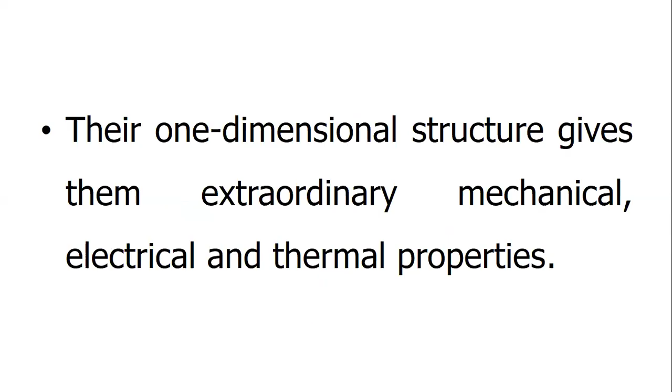Their one-dimensional structure gives them extraordinary mechanical, electrical, and thermal properties. These properties have been exploited for application in flexible electronics, sensors, and energy storage. Structure of single-wall nanotube and multi-walled nanotube.

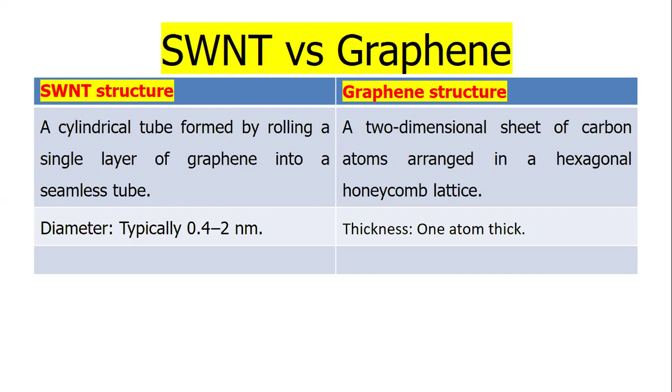Single-wall nanotube versus graphene. A cylindrical tube formed by rolling a single layer of graphene into a seamless tube. A two-dimensional sheet of carbon atoms arranged in a hexagonal honeycomb lattice. Diameter typically 0.4 to 2 nanometers. Graphene thickness 1 atom thick. Electronic properties depend on the chirality and diameter. Graphene

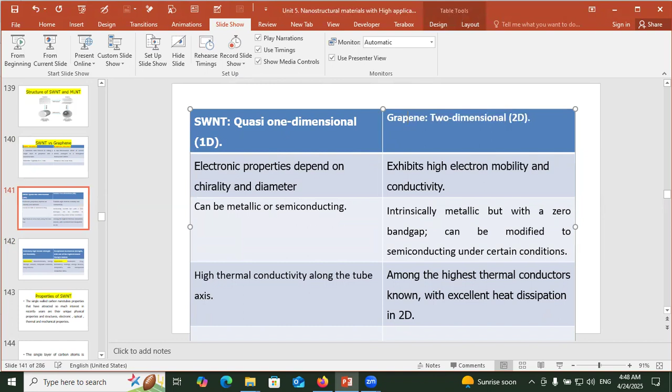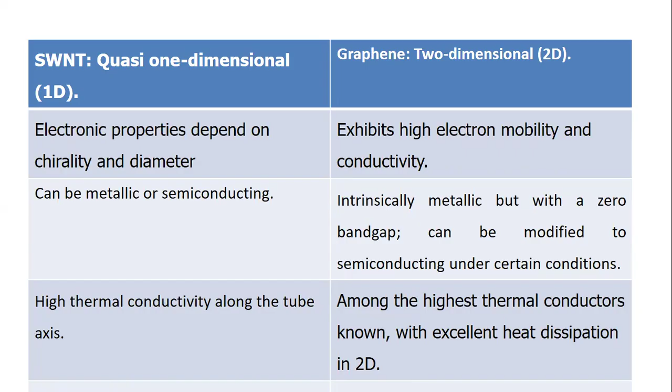exhibits high electron mobility and conductivity, can be metallic or semiconducting, intrinsically metallic but with a zero band gap, can be modified to semiconducting under certain conditions, high thermal conductivity along the tube axis. Among the highest thermal conductors known with excellent heat dissipation in two dimensions. Extremely high tensile strength and flexibility, exceptional mechanical strength with one of the highest known Young's moduli.

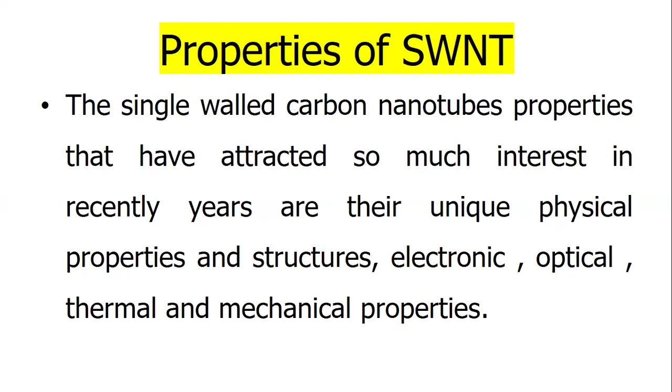Nanoelectronics, energy storage, sensors, composite materials, drug delivery; electronics, transistors, coatings, energy devices, composites, and transparent conductive films. Properties of single-wall nanotube. The single-wall carbon nanotube properties that have attracted so much interest in recent years are their unique physical properties and structure, electronic, optical, thermal, and mechanical properties.

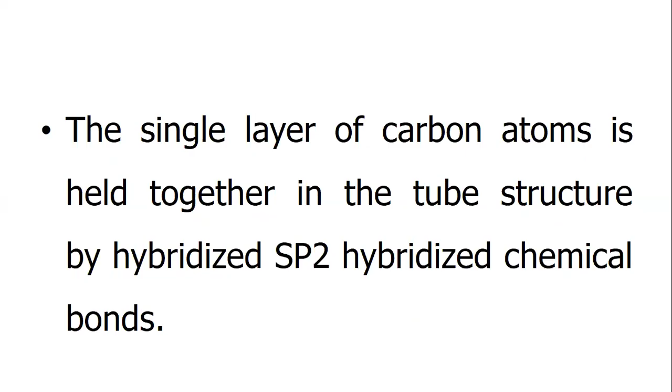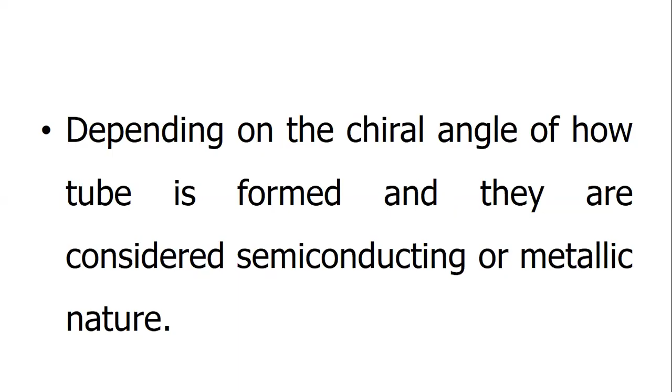The single layer of carbon atoms is held together in the tube structure by sp2 hybridized chemical bonds. Depending on the chiral angle of how the tube is formed, they are considered semiconducting or metallic in nature. Single-wall carbon nanotubes are inert and can be used to increase mechanical and conductive properties in other materials.

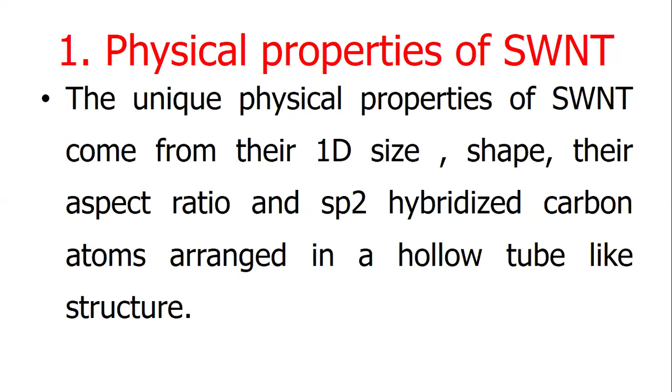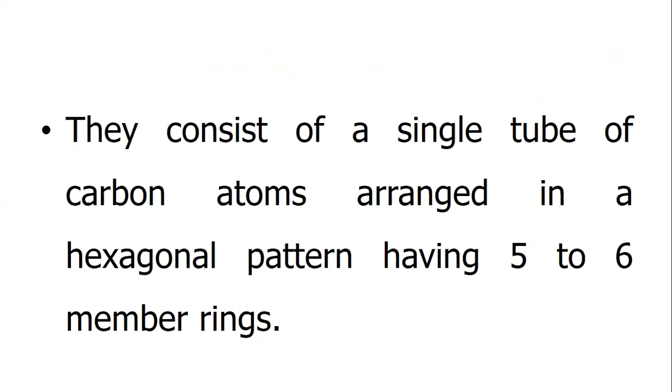Physical properties of single-wall nanotube. The unique physical properties of single-wall nanotubes come from their one-dimensional size, shape, their aspect ratio, and sp2 hybridized carbon atoms arranged in a hollow tube-like structure. They consist of a single tube of carbon atoms arranged in a hexagonal pattern having 5 to 6 member rings.

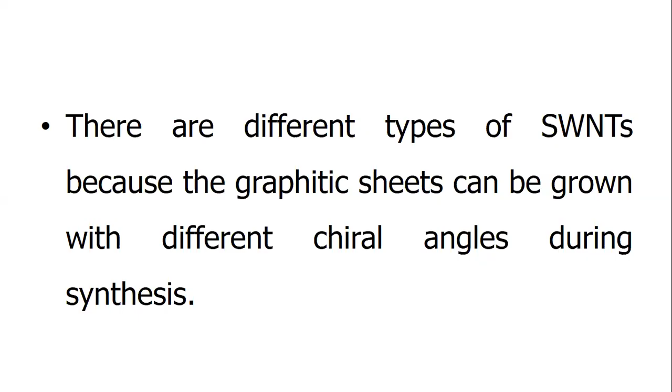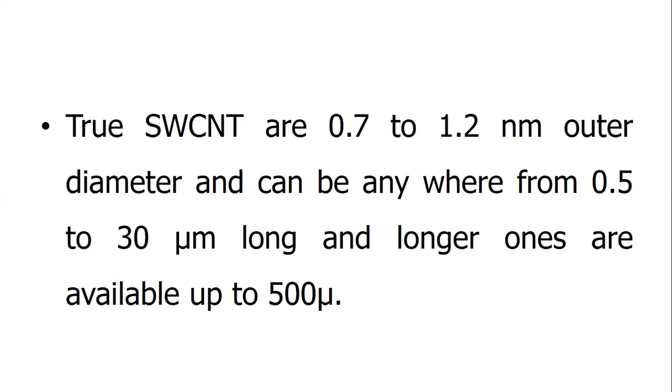There are different types of single-wall nanotubes because the graphitic sheets can be grown with different chiral angles during synthesis. True single-wall carbon nanotubes are 0.7 to 1.2 nanometer outer diameter and can be anywhere from 0.5 to 30 micrometers long, and longer ones are available up to 500 micrometers.

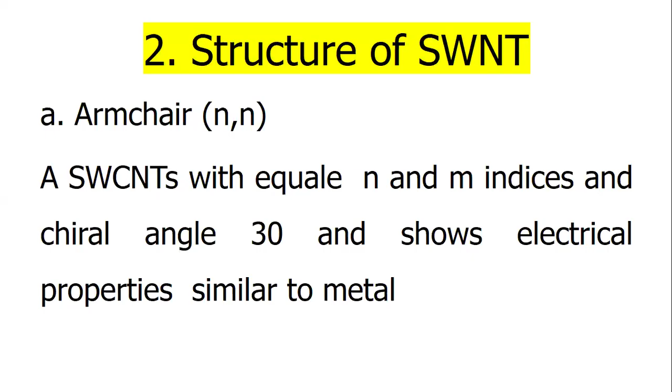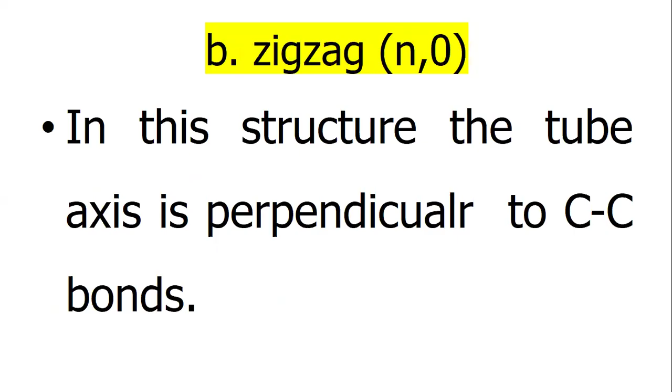Structure of single-wall nanotubes: armchair, or single-wall carbon nanotubes with equal n and m indices and chiral angle 30 degrees, shows electrical properties similar to metal. Zigzag: in this structure, the tube axis is perpendicular to carbon-carbon bonds. A single-wall carbon nanotube with (n,m) indices equal to (n,0) or (0,m) and chiral angle 0 degrees can be either metallic or semiconducting.

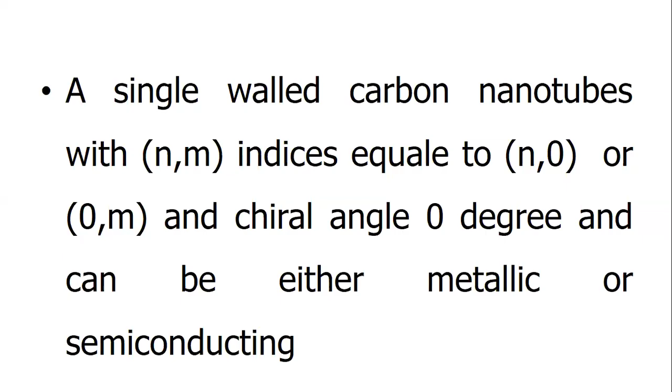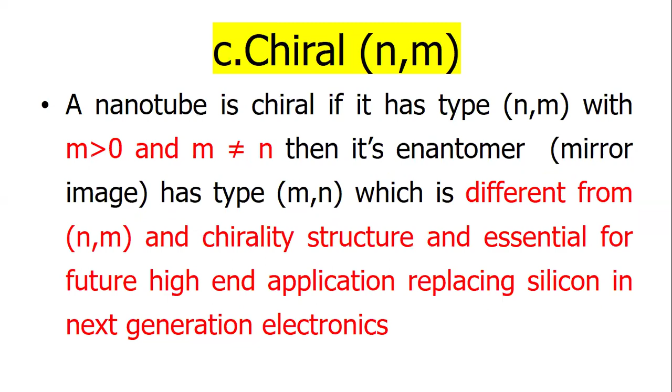Chiral: an (n,m) nanotube is chiral if it has type (n,m) with m greater than 0 and m not equal to n; then its enantiomer, the mirror image, has the type (m,n), which is different from (n,m). Chirality structure is essential for future high-end applications replacing silicon in next generation electronics.

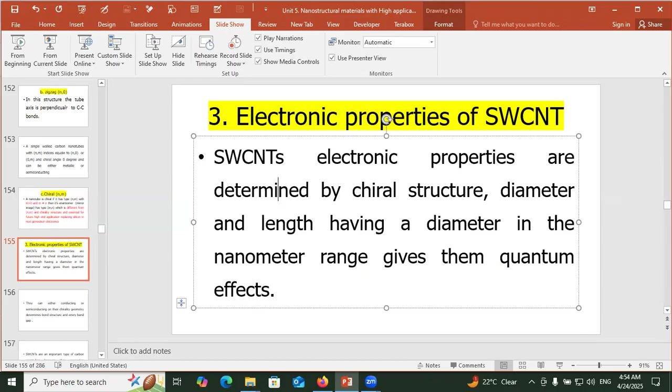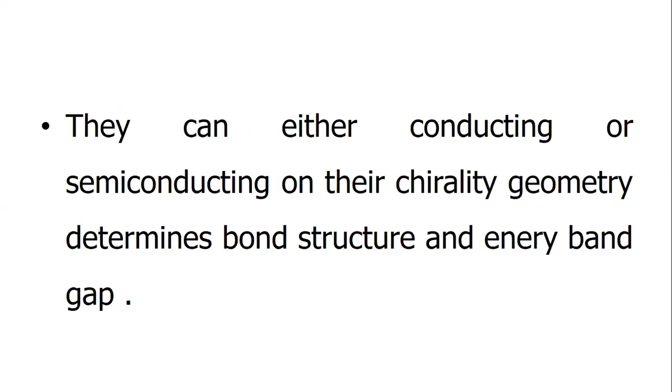Electronic properties of single-wall carbon nanotube. Single-wall carbon nanotube electronic properties are determined by the chiral structure, diameter, and length. Having the diameter in the nanometer range gives them quantum effects. They can be either conducting or semiconducting depending on their chirality. Geometry determines the band structure and energy band gaps.

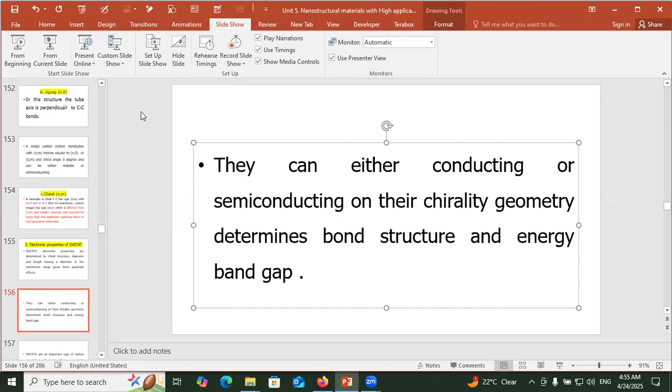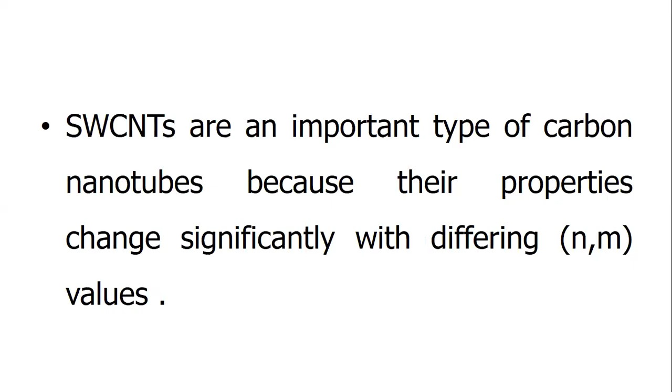Single-wall carbon nanotubes are an important type of carbon nanotubes because their properties change significantly with differing (n,m) values. The band gap can vary from 0 to about 2 electron volts and can show metallic or semiconducting behavior.

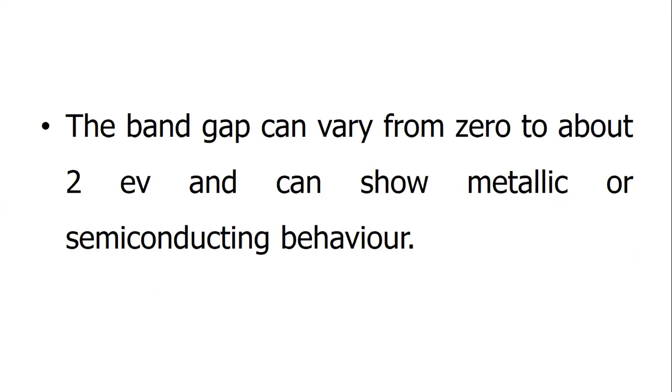Optical properties of single-wall carbon nanotubes. Single-wall carbon nanotubes can be used for their light absorption, fluorescence, and transparent conductive properties. They are known to successfully make super black light-absorbing materials when using individual carbon nanotubes standing up like a forest, because light gets trapped between the individual carbon nanotubes and cannot reflect back, due to their absorbing properties and their length.

Single-wall carbon nanotubes have been used at very low loading, 0.03 percent by weight, to make transparent conductive films for displays and solar cells to replace indium tin oxide, which has limited global resources.

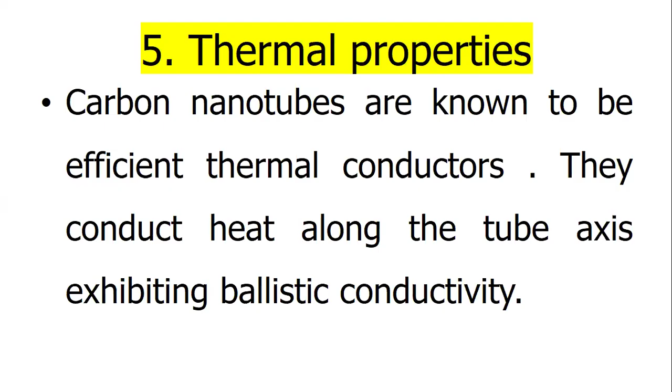Thermal properties. Carbon nanotubes are known to be efficient thermal conductors. They conduct heat along the tube axis, exhibiting ballistic conductivity. They are considered insulators for heat moving laterally to the nanotube axis. An individual single-wall carbon nanotube has a room temperature thermal conductivity of about 3500 watts per meter per Kelvin along its axis, which is many times higher than copper, 385.

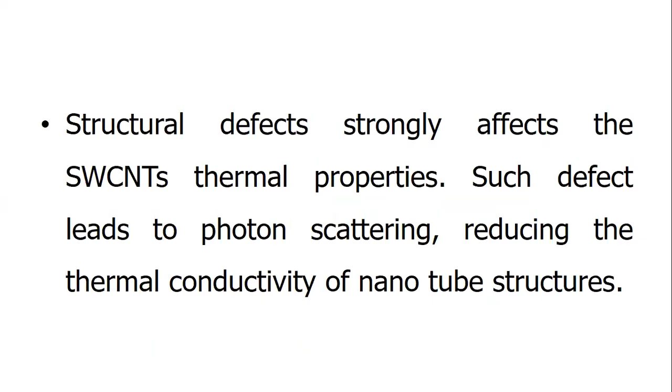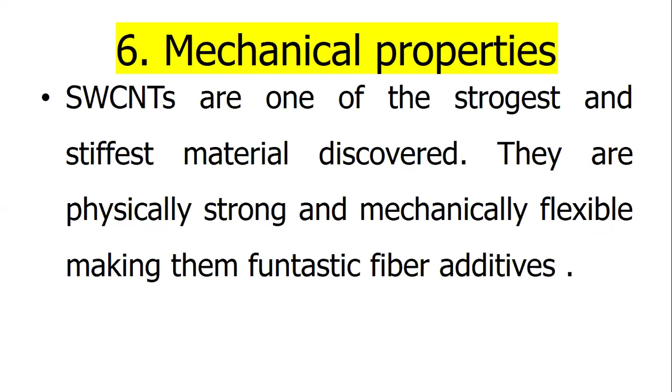Structural defects strongly affect single-wall carbon nanotube thermal properties, as defects lead to phonon scattering, reducing the thermal conductivity of nanotube structures. Mechanical properties: single-wall carbon nanotubes are one of the strongest and stiffest materials discovered. They are physically strong and mechanically flexible, making them fantastic fiber additives. Their legendary strength is due to covalent sp2 bonds formed between individual carbon atoms in their structure.

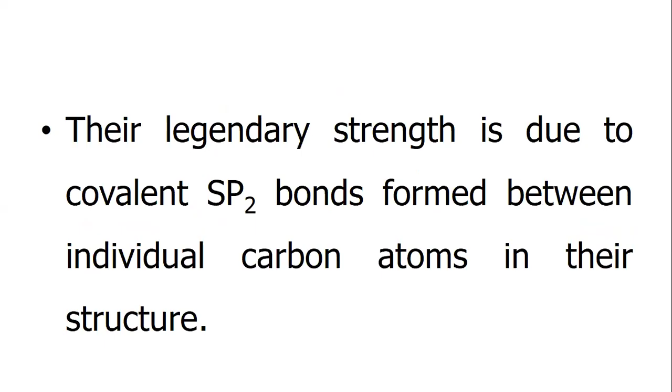Some research has shown they have average breaking strength from 13 to 52 gigapascals. They are very resilient, able to recover quickly or adapt well to difficulties or change. When they bend, they buckle but do not break. In fact, they can easily be straightened out without any damage to their physical structure. Their theoretical Young's modulus ranges from 1.28 to 1.8 terapascals, while it is 0.21 in steel.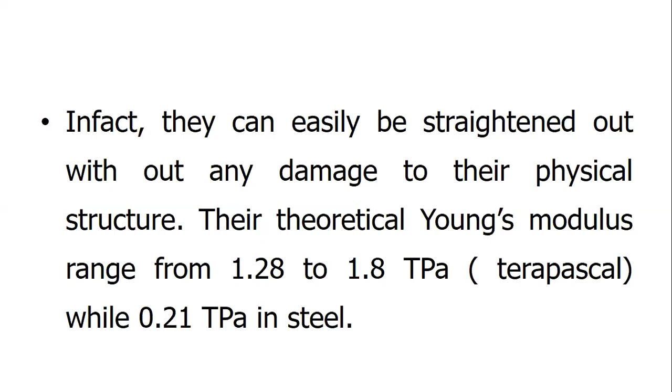Application of single-wall carbon nanotubes. Single-wall carbon nanotube applications include advanced electrodes, energy storage, conductive films, and coatings, including transparent conductive coatings; solar, electronics, thermal interface materials, structural materials, catalyst supports, biomedical and sensor applications.

Single-wall carbon nanotubes have been applied as the most basic building block of these systems. The electric wire having nanoscale diameters and an all-nanocarbon structure makes them excellent conductors. Their electrical and thermal conductivity combined with their superior mechanical properties make them ideal candidates for cutting-edge advanced material applications.

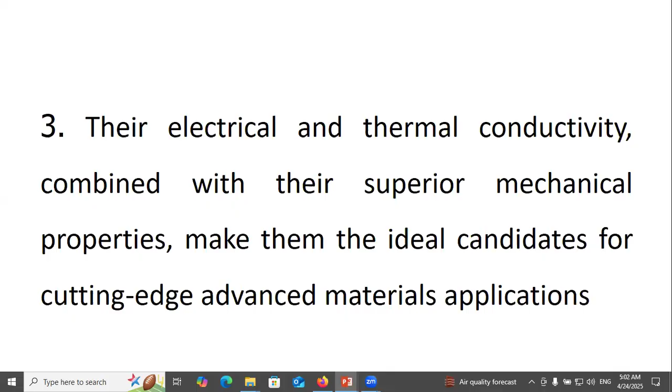Okay, it's all about single-wall carbon